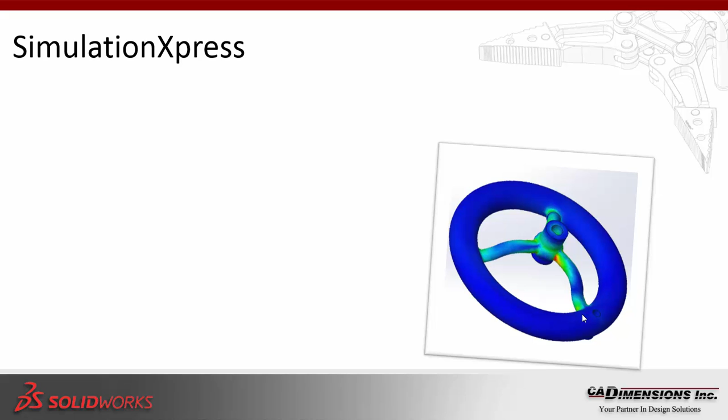Let's go ahead and start our presentation today with Simulation Express. Simulation Express is basically a first pass FEA, finite element analysis, software within SolidWorks itself. This is a structural analysis tool which will allow you to test and predict how a part will perform under a load. Once you've applied all the necessary conditions, it will show you the areas of high stress, and how the part is reacting and deforming due to the loads and how the part is being fixed.

This is very useful because it can essentially detect potential problems within your design. This is a type of tool you want to use in the early stages of your design cycle. So when you first start designing your 3D part, it's a good idea to run a Simulation Express as you make changes to, say, the thickness of the part, an extrusion, a revolve, or a radius. Run a quick Simulation Express to see how the stresses are being distributed, and make sure you're not creating any stress pockets within the part itself.

Another side note to keep in mind is that this tool is by no means meant to replace any type of simulation testing you may already be doing within your design cycle. Simulation testing, FEA analysis, is very important when it comes to designing parts. To address that, we have a full suite of simulation products within SolidWorks itself, which you would use in the later stages of your design cycle for virtual prototype testing.

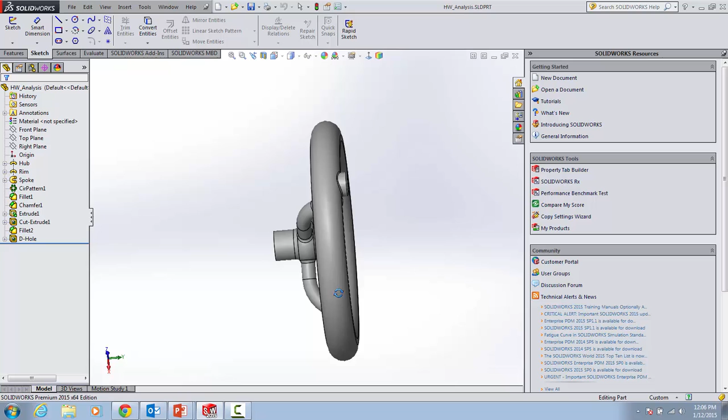A good way to predict dimensions such as the thickness of the part is to test it under extreme conditions. As the engineer, I know that eventually a part like this, once manufactured, may end up somewhere in a factory or manufacturing plant, which may have high temperatures and different humidity levels. This can cause the parts to rust, especially if you have a hand wheel that doesn't get turned for many months or years. In some cases, it may start rusting and get stuck.

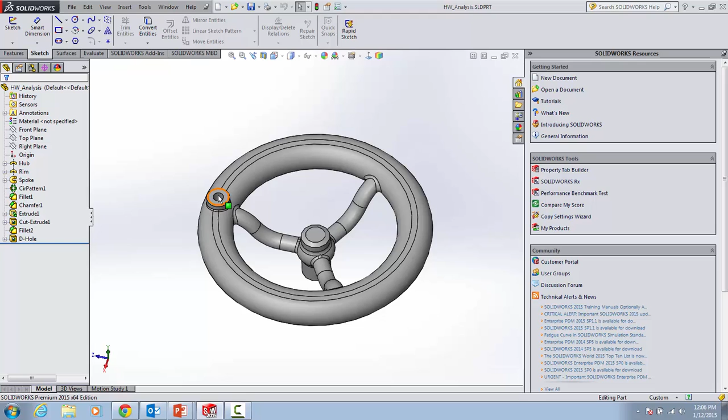When a hand wheel like this gets stuck, essentially what happens is you either crank it using your body weight, and if that doesn't work, you might start using tools to crank the hand wheel. In real life situations, one of two things can happen: the rust will break and you'll be able to start cranking the hand wheel again, or the hand wheel itself might break.

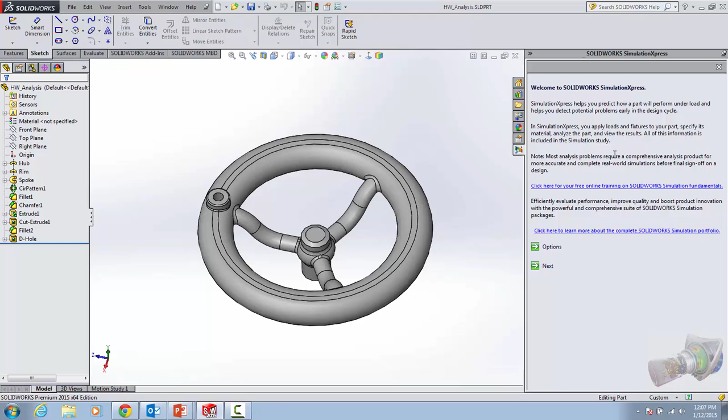As a designer, this is a big concern for me, and I want to test this part out as I'm designing it. To access SolidWorks SimulationXpress, just go into Tools, Express Products, Simulation Express, click on it, and this will bring up the welcome page for SolidWorks SimulationXpress. This page gives you some information, the same type of information I've given you before on what SolidWorks SimulationXpress was built to do.

Essentially, you would just hit next here, and this is where you start to set up your simulation analysis. Within this tool, there are 6 major steps to be able to run a full analysis.

The first step is to create your fixtures. This will imitate how the part is being held in real life.

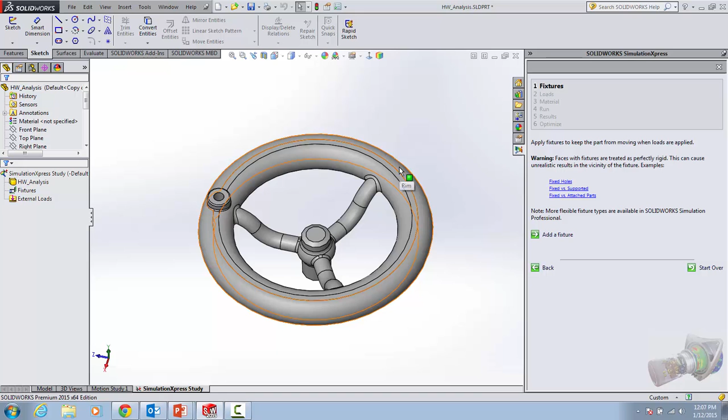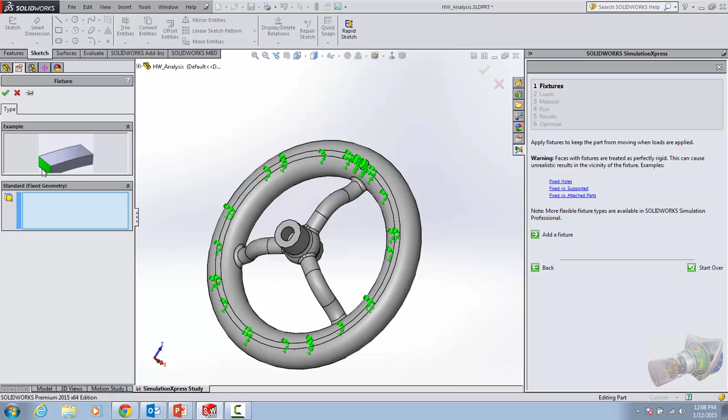Thinking back to our extreme case, this part will be stuck. So I'll add a fixture, and SolidWorks SimulationXpress gives me nice pictures to show how the part will be held based on the selected faces. If I select these 2 faces, this will simulate the part being held in place and not being able to move or rotate.

Once I've selected those 2 faces, I just hit the green check mark and I'm done. At this point, I can add more fixtures, or hit next to move on to my second step, which is applying the type of loads.

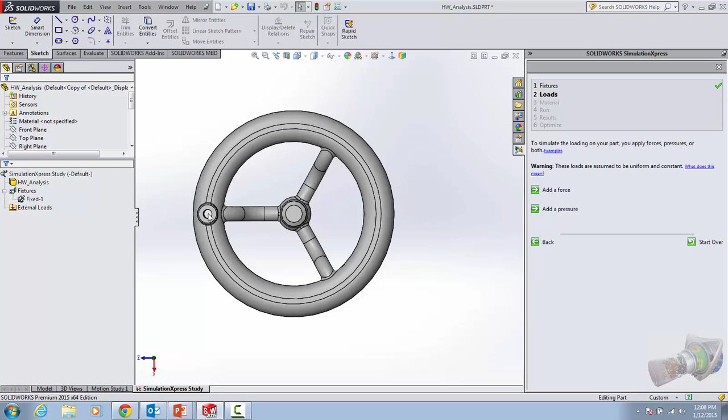Now for loads, you can add a force or a pressure. In this case, I'm going to apply a force which is in a crank motion, going in this direction or this direction. In real life, if I was going to crank this, I would probably pull down on this crank in the vertical direction, not try to crank it rotationally. It will be going straight down, so that's how I'm applying my force onto this hole, where a crank might sit.

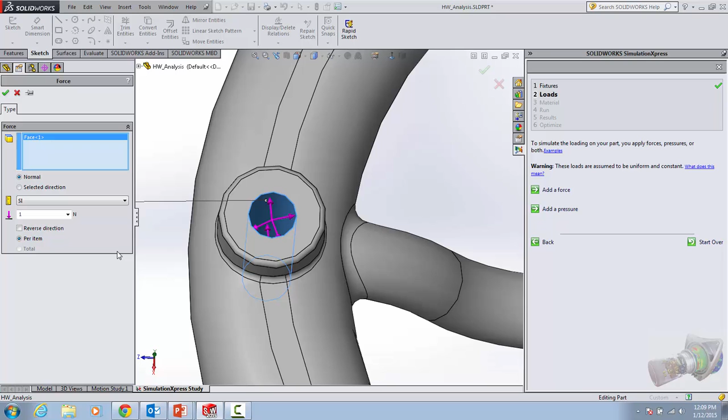So I'll say add a force. Now to create the force is exactly the same as the fixture - you select the face. However, when you select the face, the force will be applied directly onto that face. You then need a second step to direct that force in the correct direction.

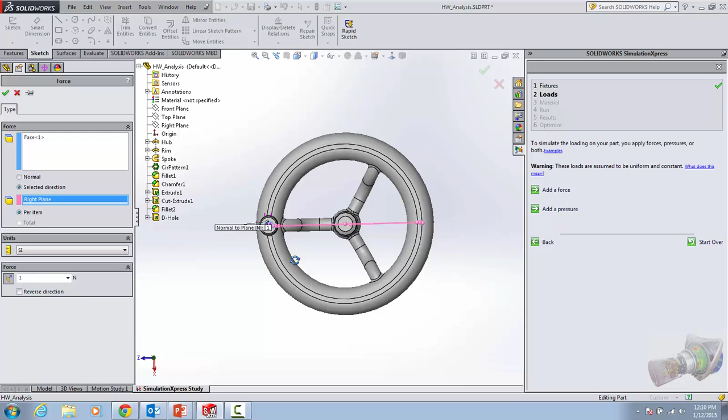So in this case, I'll say selected direction, and pick a plane which is normal to the direction I want. If I want the force to go down in this direction, I'll pick my right plane. You can see that's my right plane right there, and the force arrows have now changed to point normal to that right plane.

The force I'm going to use - think about a hand grip is about 150 newtons, so 2 hand grips is about 300. I'm going to multiply that by 10, so about 3,000 newtons applied onto this hand wheel. That's quite a bit, but this includes all my safety factors within the part itself. If it's built to last 1,000 newtons, I'm giving it 3 times the safety factor, so it can withstand up to 3,000 newtons without problems.

It's always a good idea to design better parts so they last longer, especially parts that come with warranties. So at this point, I can either add more forces or add a pressure, but I'm just going to hit next. Now the next step is to add a material.

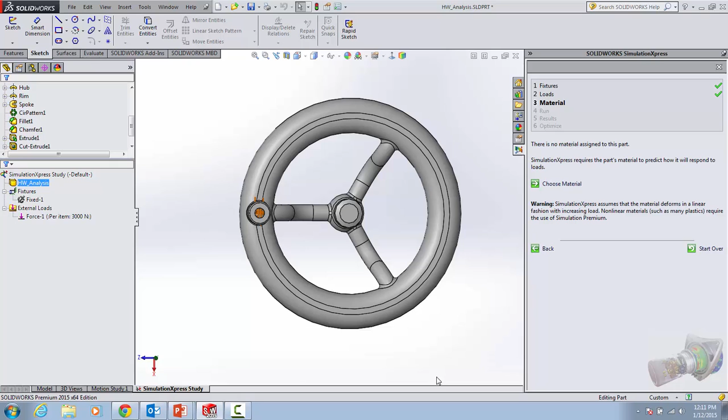It's important to add the material to your part, because that's where SolidWorks SimulationXpress extracts the strength information of your part. So if I say choose material, I'm going to choose a realistic material for these types of hand wheels, which is probably brass - copper alloy, brass.

I'll apply and close, and right away it extracts the Young modulus and the yield strength. This is essentially how the part will stretch and deform, and this drives the strength of the part itself, showing us some of the stress pockets or high stress areas based on this yield strength.

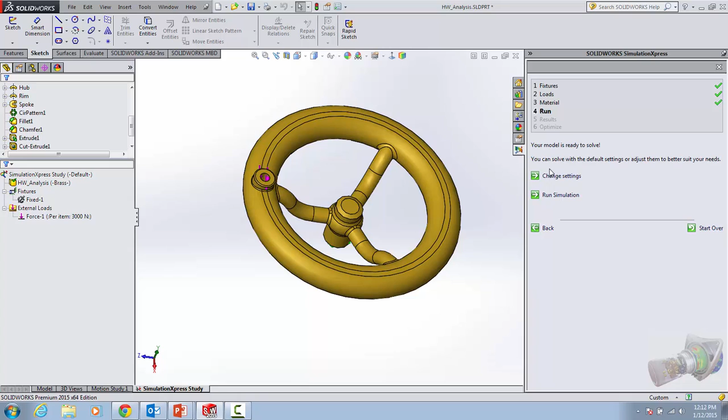Okay, so I hit next. That's all you essentially have to do to set up the simulation. Now you just hit run, allow the part to solve, and right away SolidWorks SimulationXpress gives you a quick animation on how the part will react to the forces you've applied.

Based on how this part is reacting, you can see it actually has that hand wheel motion, being cranked based on the force applied in that vertical direction. So to answer the question - does the part deform as you expect - I'll say yes, continue.

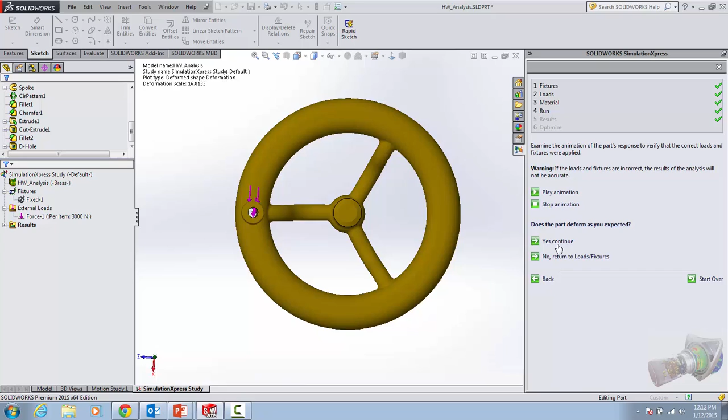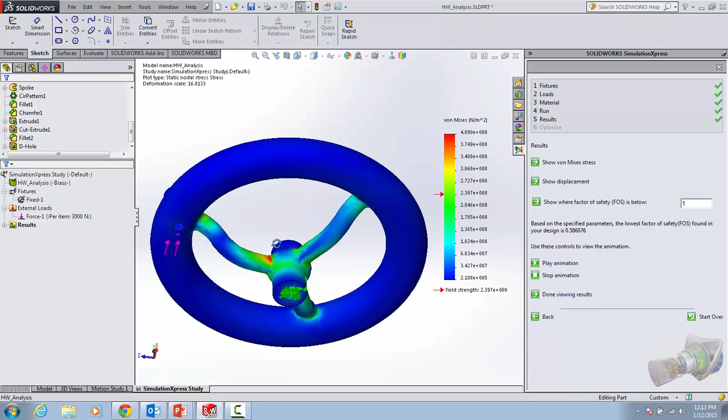The next step, step 5, is where I can view all the different results that SolidWorks SimulationXpress provides. The first result is the von Mises stress. Within the von Mises stress, I can see where my yield strength is placed and some areas which surpass that yield strength, in the red zone, the danger area. You can see that end of those spokes there - it's not very good, so this might not be a very good design.

So if I show my displacement instead, the highest displacement that occurs within this part is 1.19 millimeters, so it might not be that bad after all.

Based on my factor of safety, it is found to be 0.586, so it is half of the force that I applied, 3000, so it should be able to withstand up to 1500 without any problems.

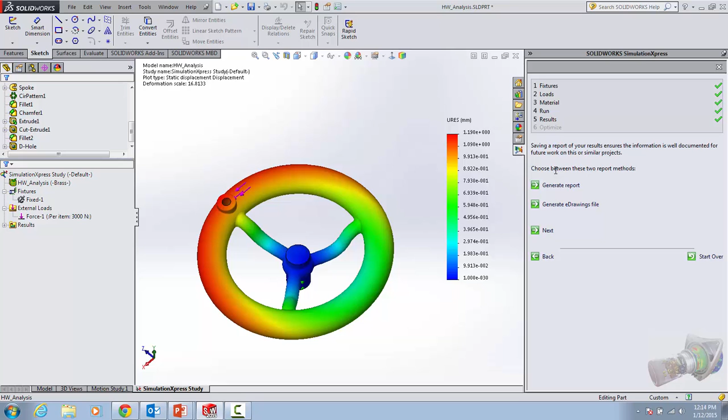Alright, so at this point you can say done viewing results, and the next step is you can actually produce a nice Word document or a report for you to print out and keep on your desk, or to file, or even to give to a prospect or your customer on some information that you got running this simulation. So in this case I can say generate report.

And I'm going to say in this conclusion that this part may fail due to very high loads above 1,500 newtons. Alright, and I'm going to say generate, and you can see as long as you have Microsoft Office 2007 and above, it will automatically tie into that software and generate this report for you.

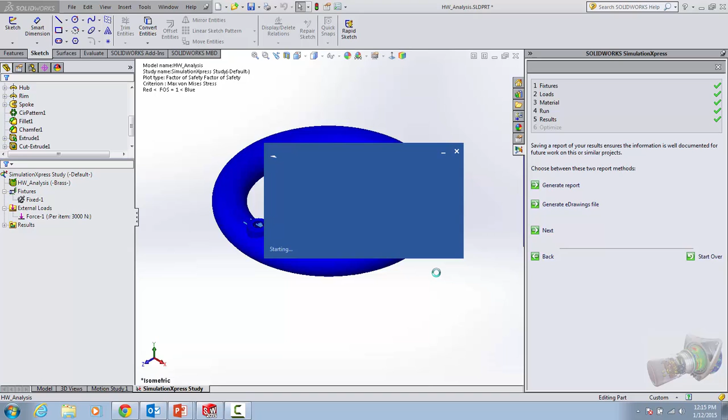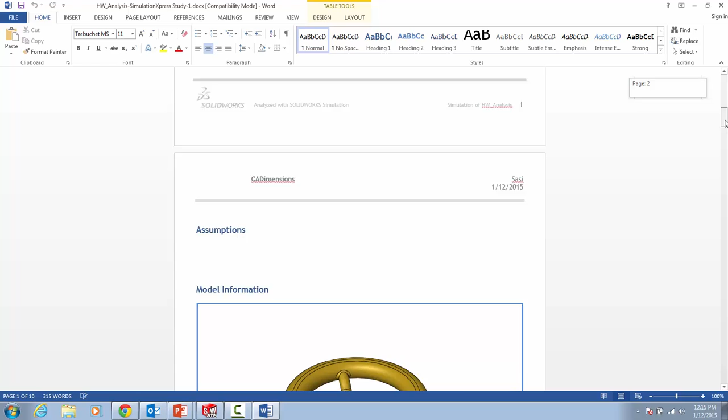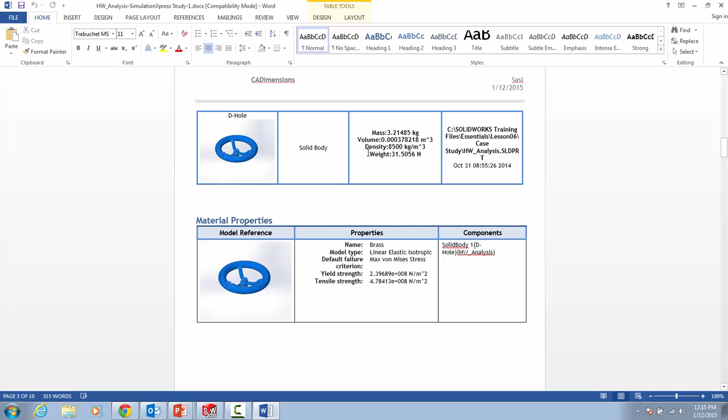Right away I get that report. You can see that this is a 10-page report, very good, quite a bit of information, and you can see that it has the part itself. It shows the type of properties the part is carrying, such as the mass, the volume, the density, the weight, based on the material that is being set, which is brass.

You can see how the part is being fixed here, how the load is being applied onto this part, the mesh information that went into creating this part, how the mesh actually looks, and last but not least the result, which is probably the most important part of this report, and your conclusion, which I essentially wrote in.

Okay, this document is fully editable. You can edit it, save it, print it out, and pretty much do whatever you want with it.

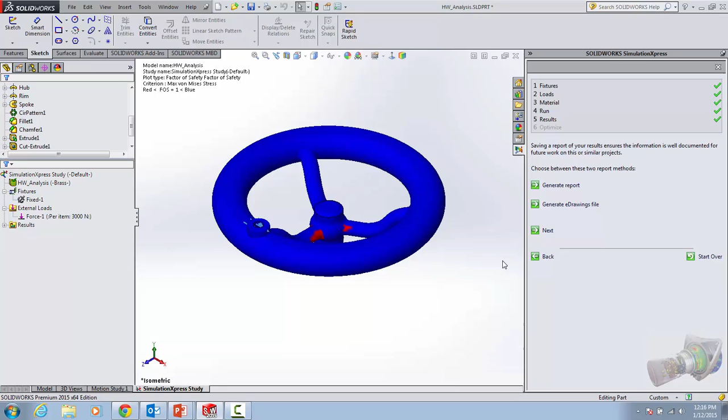Alright, so you can also generate eDrawing files. So what this does is it allows you to send all that results into your eDrawing, so you can send it off to someone and they can even view all those results within the 3D model itself with all the pictures and all the colors. Give them a good perspective rather than just looking at a report or a PDF document.

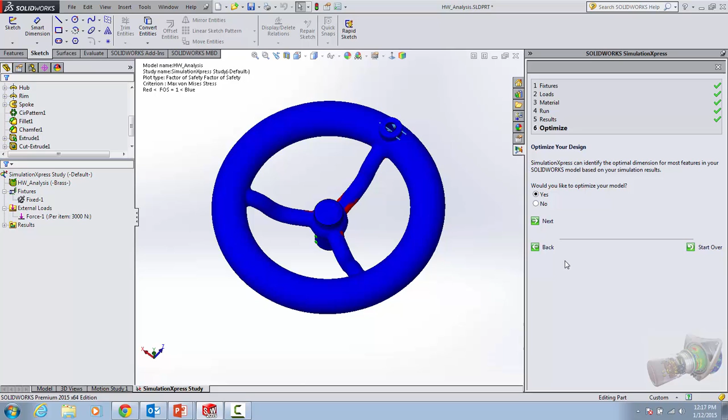So here I'm going to hit next. Now in this case, if you're not happy with your results, you can actually optimize your model. So let's take a look at optimizing this design here. So would you like to optimize your model? I'm going to say next.

And what would happen is that the part would bring up all the dimensions that went into building that part. And you can actually start picking dimensions to create parameters, and using that parameter you can build different ranges or different sets of dimensions and run an optimization study. So in this case, it showed me that the spoke itself might not be thick enough.

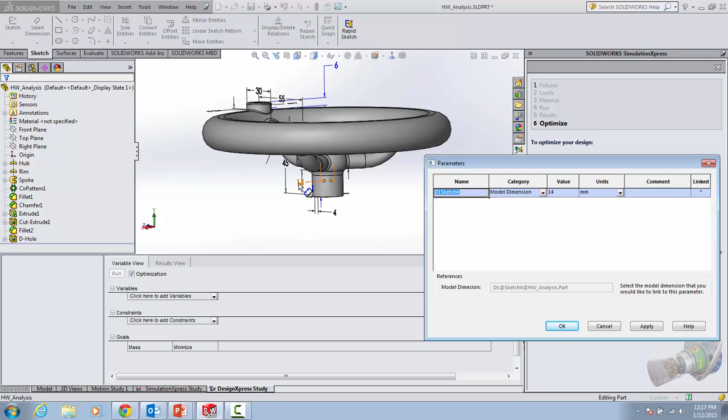So in this case, that spoke dimension here is actually 14. So I might want to bump that number up to perhaps 18 or 20 or 22. Now I'm not sure if 18 is going to be a good enough number, or perhaps 22 might be an overkill. It really depends on what I'm trying to do for this part.

So what I'll do is I'll pick that 14 as my parameter, and here I'm going to say okay to add that to my parameter list. And instead of using a range... well, I'm going to keep using a range, but I'm going to set this number between 18 to 22. So 18, 19, 20, 21, and 22. It will run 5 different instances.

Based on some constraint that I'm setting, it can optimize and actually tell me which would be the best dimension to set this up to. So here I can say maybe factor of safety is greater than 1, just so that I can hit that 3000 newtons mark, and my goal is to minimize my mass. So that's fine, I can set that, leave that as is. So as soon as you've set up your 3 conditions here, just hit run.

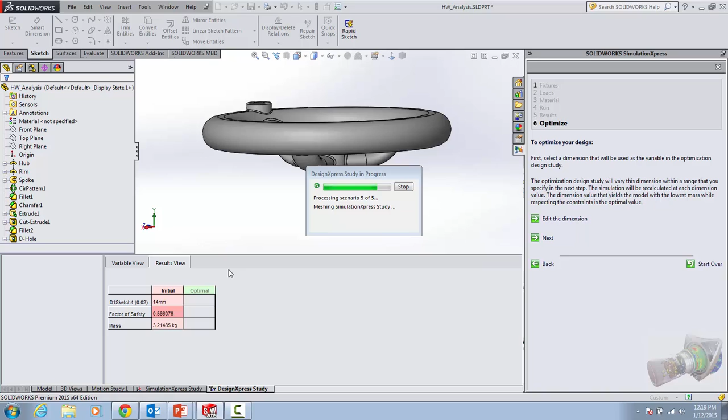Right away, the SimulationXpress will run 5 different instances, and it will give me that optimal number. Here it says optimal is 22 millimeters, so that's the maximum number, and only at 22 millimeters will I get a factor of safety above 1. The final mass would be 3.34 kilograms, which is something I could probably live with, not much difference from my original mass.

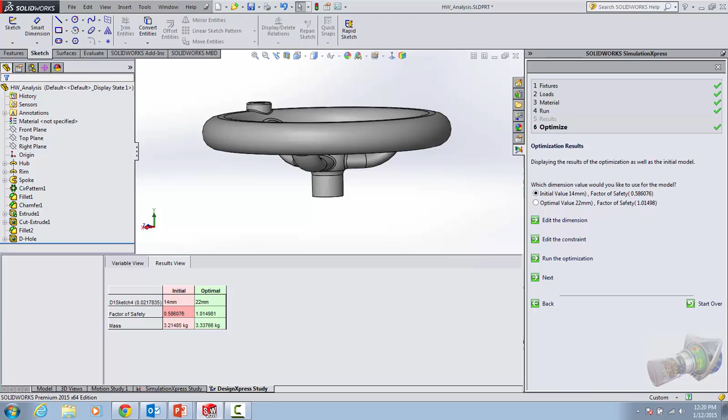Pretty nice, concise tool to use. Again, readily available, you can start using that as of today. Alright, so that's all I wanted to show for Simulation Express today.

Now let's head back into our PowerPoint. As I had mentioned before, this Simulation Express by no means should be used to replace a full-blown FEA analysis within your design cycle. So to run your virtual prototype testing, SolidWorks has a SolidWorks Simulation suite.

Next up, let's talk about FlowExpress. Now FlowExpress is a CFD package, a CFD version of Simulation Express. Many of you know SolidWorks has a full-blown CFD package called SolidWorks Flow Simulation, and this is essentially a first-pass version which allows you to calculate how fluid will flow through your part or assembly model, find any pressure areas within your enclosed parts, and show you how the fluid is flowing. So if there's any leakage in your model, or pockets where fluid is building up, it will show you based on the velocity field within FlowExpress itself.

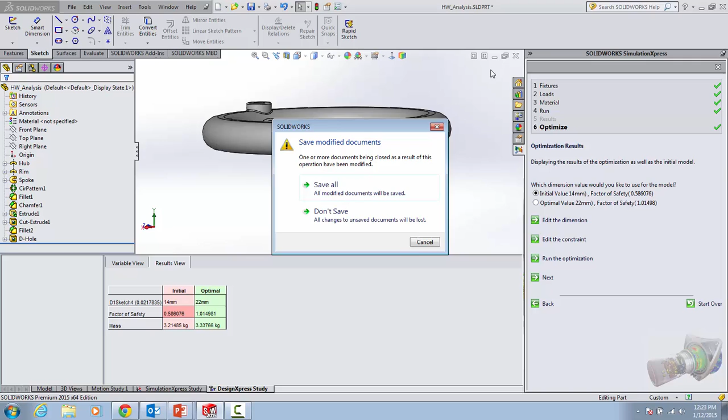Let's take a look at an example of this within SolidWorks. I'm going to close this out. What I have here is a globe valve which has fluid flowing through it and fluid flowing out of it. Now unlike SolidWorks SimulationXpress, which you could only run on SolidWorks parts, SolidWorks Flow Express you can run on both parts and assemblies.

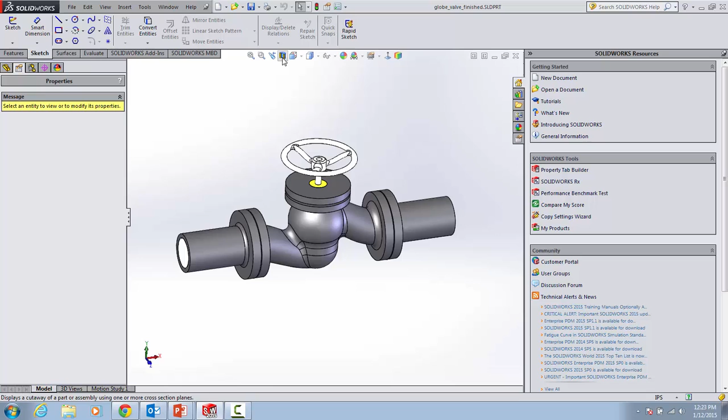Let's take a look at a section view of this valve, and you can see how the inside is built, essentially how the fluid will flow in here at the input, and then out the outlet right here, the inlet and the outlet right here. Now the most important step when creating a FlowExpress is that the part needs to be airtight. In this case, you can see I have two lids here which completely close up that inside volume.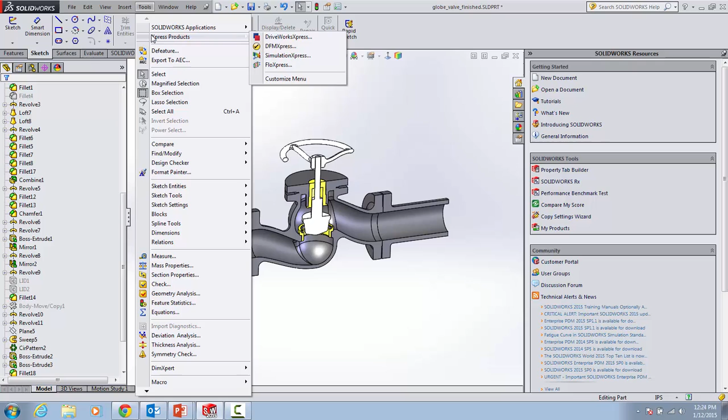Now if I were to simply suppress these parts and start to use my FloXpress tool, when I start the FloXpress it will say welcome to the SolidWorks FloXpress, very much like the SimulationXpress, and I hit next.

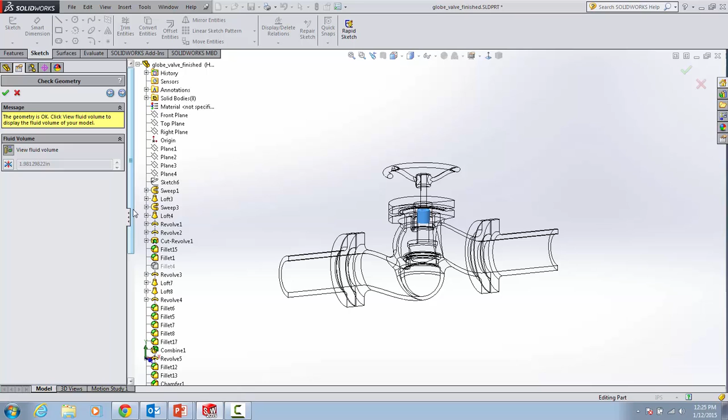If I say view fluid volume and hit OK, now that is not correct, because the fluid running through the system should be within the inlet and the outlet. So essentially now you have a model which has a leak in it, and this will not run correctly. So you have to fix that within your model itself.

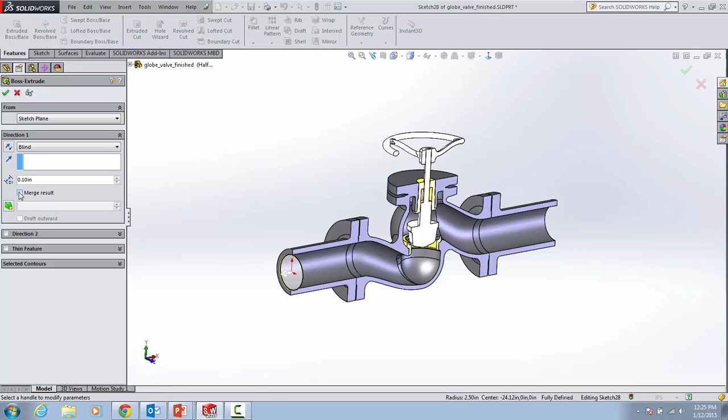One way you can do that is to simply come in here and create a lid by sketching on that face. So I can come in, use a sketch on that face, use convert entities, select that circle, say OK, features, extrude. Make sure you uncheck that merge result because it has to be its own body. The extrusion should be towards the inside of the model, so I'm going to change that direction, and say OK, and that is my lid that has been created for this part.

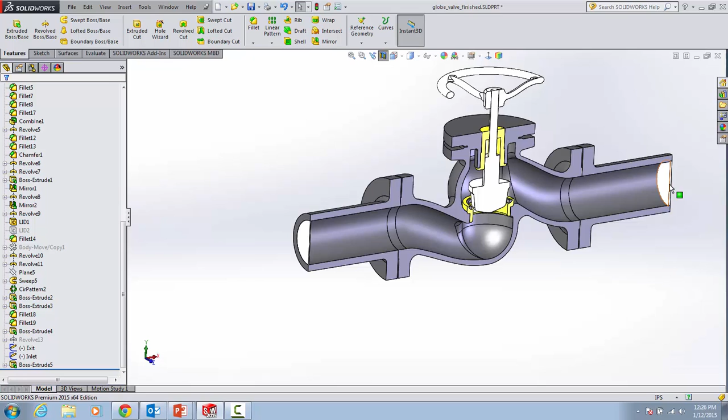Okay, so let me go ahead and unsuppress the second lid that I have here. I'll turn off this lid as well, just so I can keep the consistency of the thickness on both sides. Alright, so now I'm ready to run my FloXpress. You can see right here, if I say view fluid volume, that is the correct volume within my part itself.

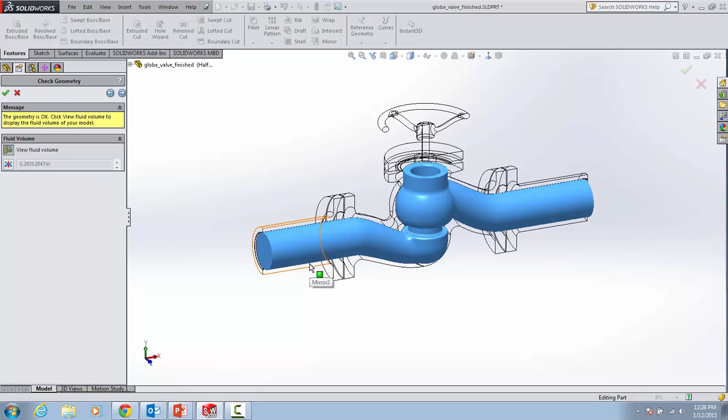Now this functionality alone is very useful when it comes to designing airtight products, or products and assemblies that have fluid or air running through them, because you can see how the distribution of that fluid or air within your part is. Now once I have verified that it's an airtight part without any leakages, I'm going to hit next.

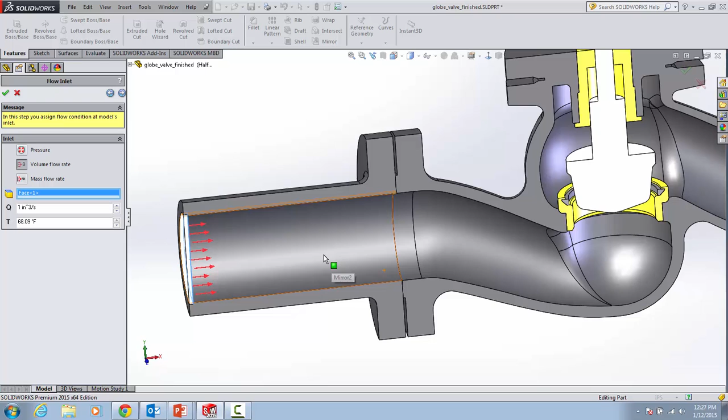You can pick to either have water or air running through your system. In this case I'm going to say water. Hit next. Now the first step is to apply the type of flow for your inlet. For my inlet, I can pick just a pressure, a volume flow rate, or mass flow rate. In this case, I'm going to say volume flow rate at 1 inch cubed per second, and the temperature I'm going to pick is about 68 Fahrenheit. I'm going to hit next.

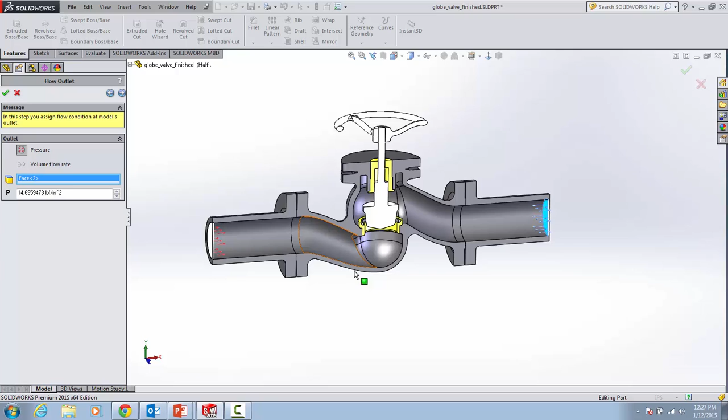Now for the outlet, it's simply going to be atmospheric pressure. So as the fluid comes and hits this outlet right here, it's basically flowing out into the air. I'm going to hit next. That's it. I solved the simulation.

And right away it will show me the water molecules or water particles within my system itself. Now to give you a better preview of how this fluid is going to be running through your system, you might want to pick the pipes and just hit play, and you can actually see that trajectory as it's flowing through your system.

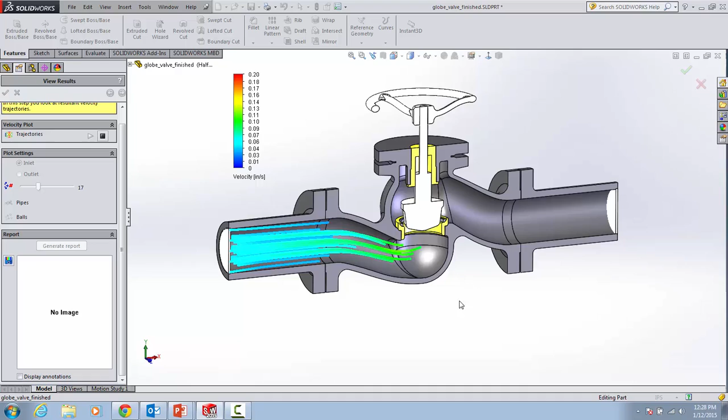Now what's nice about this is you can see how that fluid is kind of building up down here, so you might want to change the dimension of that curve down there, and you can also see how the velocity is at that valve opening, and also as it comes out the valve, is it picking up velocity or is it losing velocity as it's coming out. These are the type of information you can get from your FloXpress.

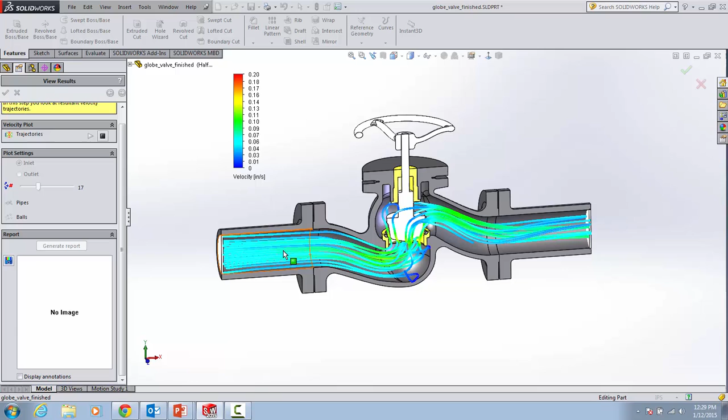So in this case, we have a pretty successful part where the fluid is running through the system without any problems. Now again, just like Simulation Express, you'll be able to generate a report for FloXpress. Just hit generate report, and you can see that I have a Word document which gives me all the information with the inlet, the environment, pressure at the outlet, and the velocity running through my system, or what the velocity is at.

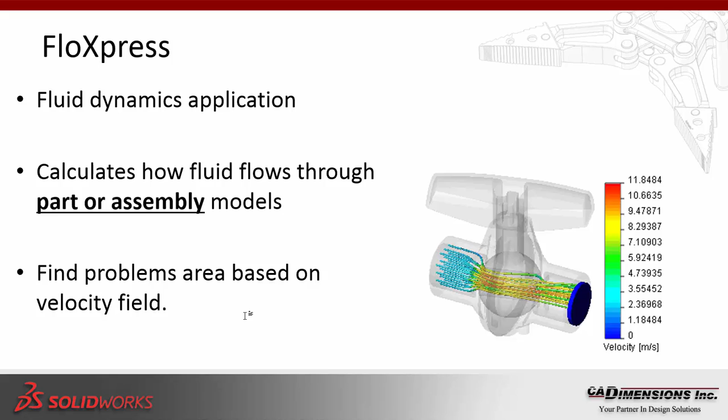Alright, so that wraps up SolidWorks FloXpress. Now just like SolidWorks Simulation, FloXpress is by no means a tool to replace any kind of computational fluid dynamics analysis that you may or may not be running in your current facility. So if you do need to run any type of fluid flow analysis, SolidWorks Flow Simulation can address those types of analysis. You can see here that we have an array of analysis types within our SolidWorks Flow Simulation.

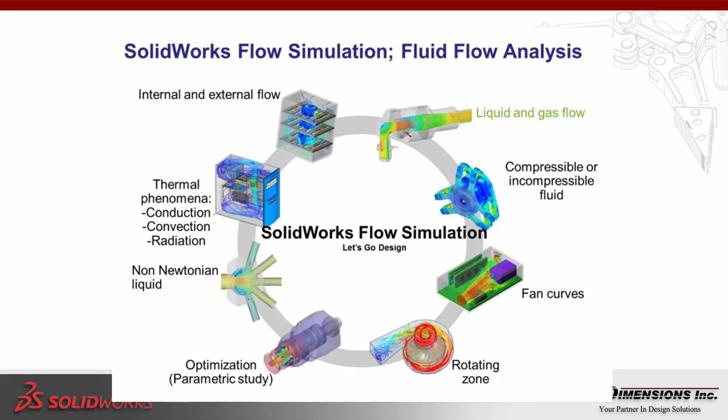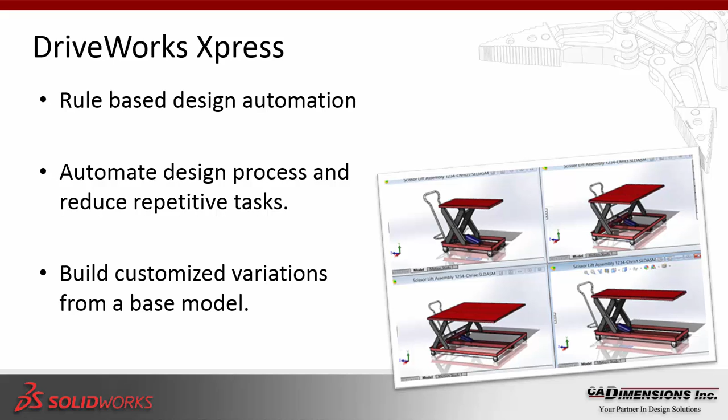So I'm going to start this portion of the presentation by opening up an existing assembly that already has DriveWorks set up in it. The reason I'm doing this is because I want to show you the amount of capability and depth of capabilities that's already available within DriveWorks Xpress, and this is pretty remarkable considering that this add-in is already available within your version of SolidWorks right now, and it's completely free. You don't have to pay anything extra to get access to this.

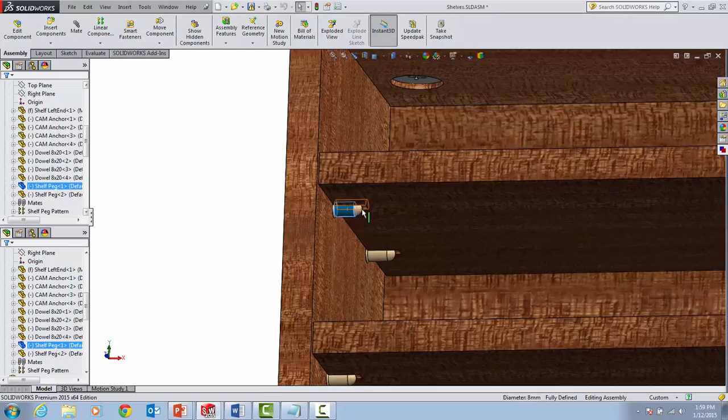So what I have here is a shelving unit which has every bit of part included in it, and it basically includes all the cam locks, all the pegs that hold up these shelves, all the cutouts for the pegs. It even includes all the screws in the back to hold the backboard, and all the material have also been set in this assembly.

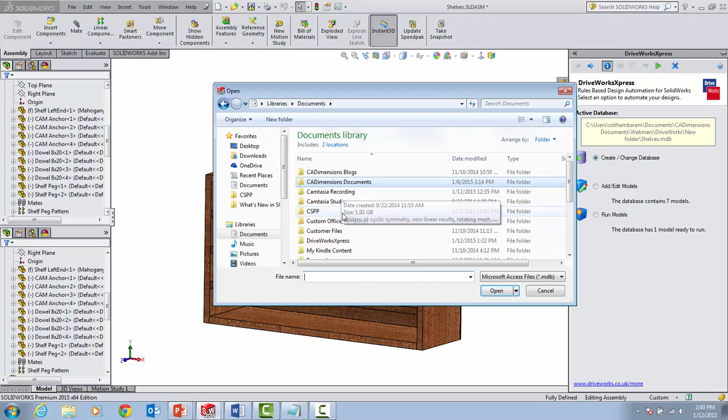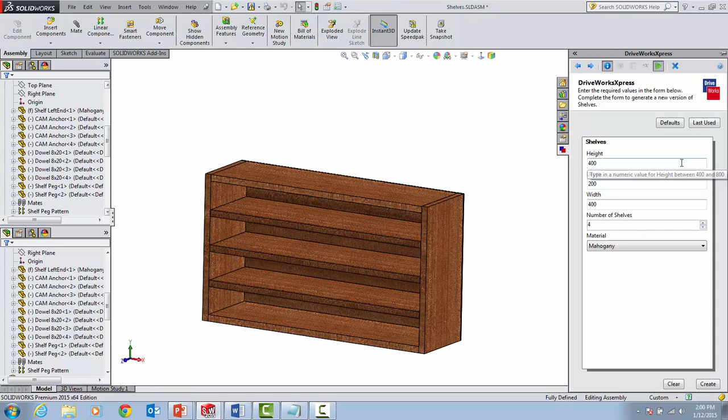Now when we invoke DriveWorks Xpress, the first thing is to make sure that you're in the right database. So I'm going to create or actually set a new database, which is this .mdb file, and this .mdb file gets created when you start up a new DriveWorks project. So this is a completed project again, and you can see from my menu here, I can pick and choose some different combination of this assembly to create a completely new assembly.

So let's go ahead and play with some of these numbers. I'm going to say the height of this is 600 millimeters. I'm going to keep the depth the same. I'm going to keep the width the same. I'm going to add number of shelves, I'm going to say 5. And I'm going to change the material to pine. And watch what happens when I say create.

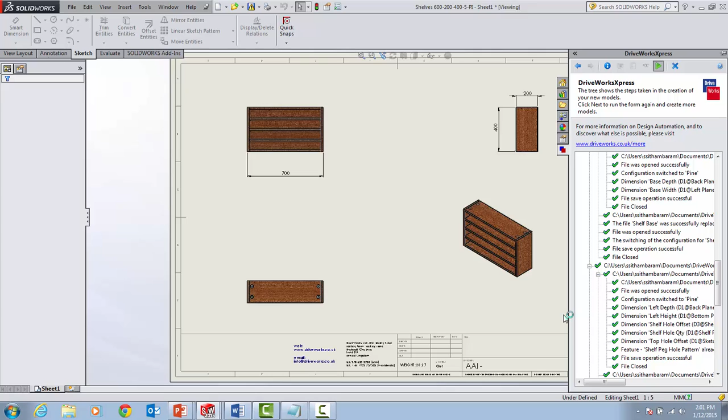You can see all the parts that go into building this shelving assembly is being recreated in the background, all automated. And even all the drawings that are associated with the assembly also get created for you automatically. So you see here, you can actually see all the process that it went through to build this new assembly, and voila, a whole new assembly with the 600 millimeter height and 5 shelves as I picked in my menu.

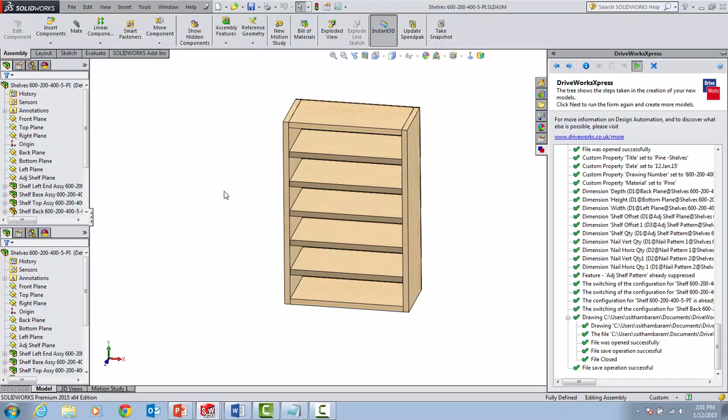Also a new material. Now if we take a look at the folder that we created, you can see here all the new files were created for me, and even more so, you can see that I even have a drawing that has been updated automatically for me.

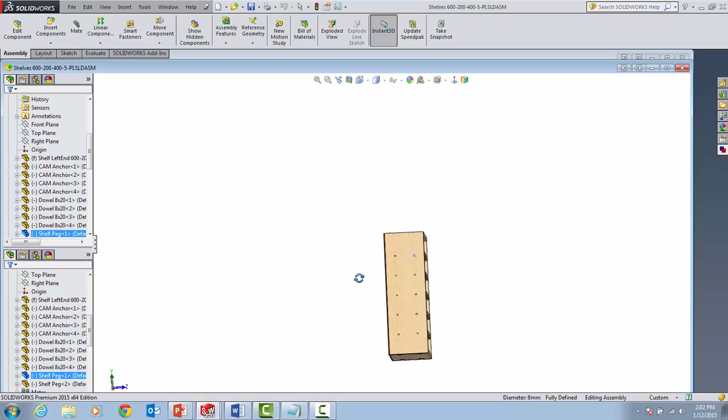Now keep in mind there was other equipment included in your assembly, such as the cam lock and the peg. They all updated to its correct new location, all done according to how you set up and created this assembly. As long as you've put all the right information in, you'd be able to create multiple assemblies such as this. So let's go in the background and see how we can create something like a shelf.

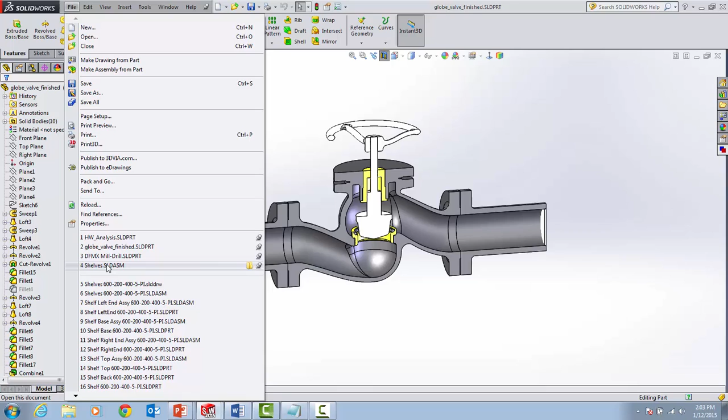So I'm going to open up a model that I have here. This is a simplified model. I took all the cam locks and the pegs away.

What I'm going to try here is set up a new DriveWorks database project which only drives the height of my shelving unit. Basically it gives me 3 options: if you want a 4-unit shelf, a 6-unit shelf, or an 8-unit shelf. So depending on what I pick, the new assembly should automatically create it.

So let's start by creating a new database. I'm going to say create database, okay, and I'm going to say this is for our demo. I'm going to say open, and add a model, and use current open model.

When you select this assembly or any assembly, the first thing you need to do is capture assembly structure. As soon as you say capture assembly structure, everything that goes into that assembly, all the parts, are listed in this menu here.

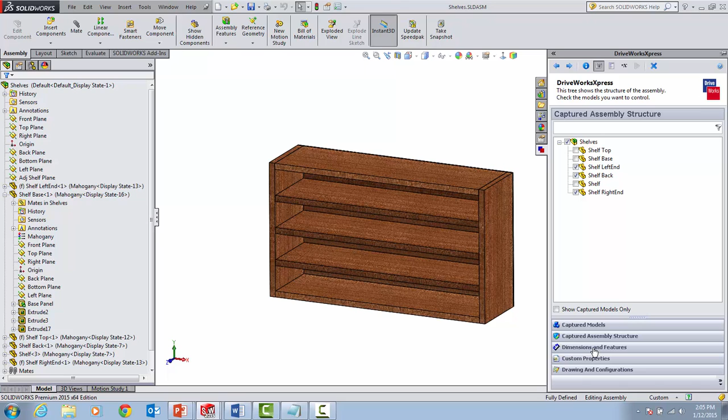So I'm going to double click the part itself, and I'm going to pin this in just so that it stays there. And if I pick on dimensions and features, if I pick that dimension, I can say left height and add that in.

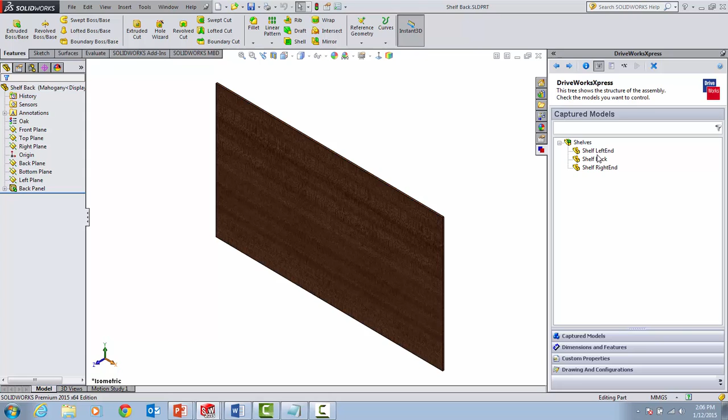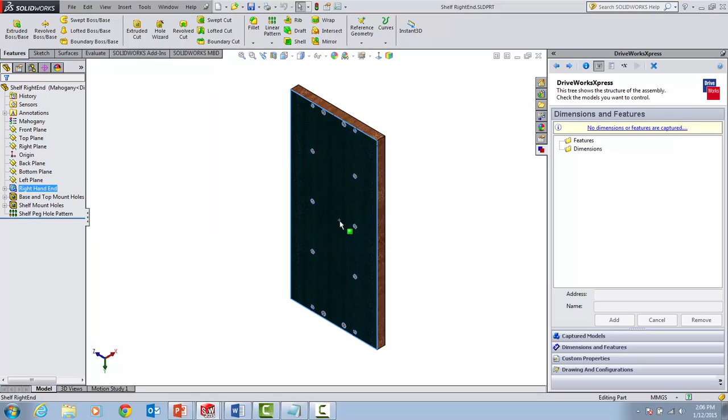Shelf back, back height, and add that in. Hit capture model, and then the right side, double click that, and right height, and add that in.

Now that I've added those three dimensions to drive my height, one more thing that will be affected when the height changes is the number of shelves, because that's basically driving the type of form I'm going to create. So it will be a good idea to create a driving dimension for the number of shelves that is going to be created.

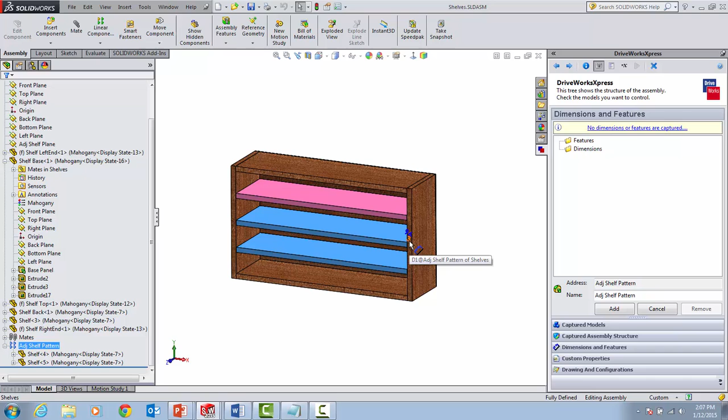Now the number of shelves being created in this assembly is driven by a shelf pattern here. So I'm just going to click on that, and you can see the number of shelf is brought up right here. So I'm going to click on that, so that shows up as a dimension, and I'm going to say number of shelves and add that in.

Okay, so all this is set. I'm going to say next. Now what is going to be driving the change of this assembly?

So this is going to be number of shelves, and I'm going to have this as a drop down menu, with 4, 6, and 8 as three different types of shelving unit that I can have: a 4 unit, 6 unit, and 8 unit.

And I will say next here, and in this page is where you set up the conditions to change the form that you've just created. So in this case, I'm going to say create a rule. You can see I have 8 rules here, 4 missing file names and 4 for dimensions. So let's pick both these.

And say next. Now for the file name, what they're basically looking for is when I create a new assembly, what is driving that new name. As you saw in the earlier example, when I created the 5 unit, it created an assembly with a .5 at the end, because that is the number of shelves. So I'm going to use the same technique here.

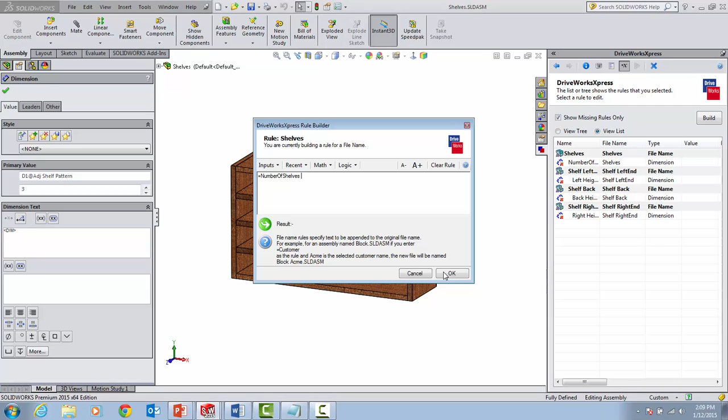I'm going to say build, and I'll input the number of shelves. You can see it gives you some information here. File name rule specifies the text to be appended to the original file name, so when I create another assembly, it's going to say shelf 6.asm, SLD ASM. Okay, so all that rule has been satisfied.

Now I have a number of shelves here, driven from that pattern. Keep in mind, 3 pattern builds 4 shelves. So what does this mean? When I say 4 shelves, the pattern value is 3. When I build 6 shelves, it's 5. When I build 8 shelves, the pattern is 7, because there are 7 actual shelves on the inside.

So this means when I say number of shelves, it actually equals the number of shelves I input minus 1. That gives me this number. So if I say 4 minus 1, that's 3 - that's the base unit I'm starting with.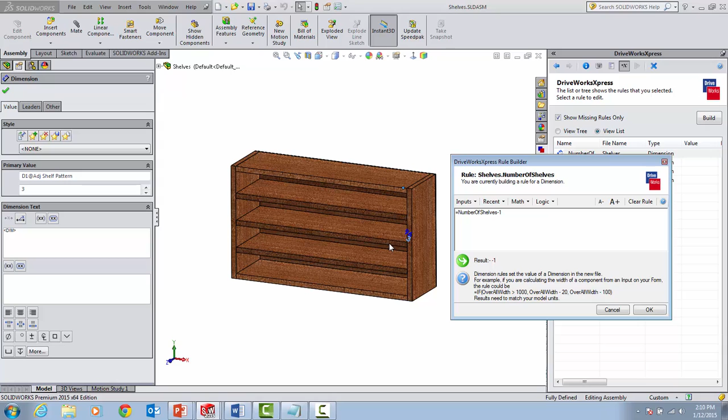I'll say okay here, and then I have this value which is currently set to 400 millimeters. It needs to change according to the distance of these shelves - 4 unit, 6 unit, 8 unit. So I've built a small equation to help with that, which you can see right here.

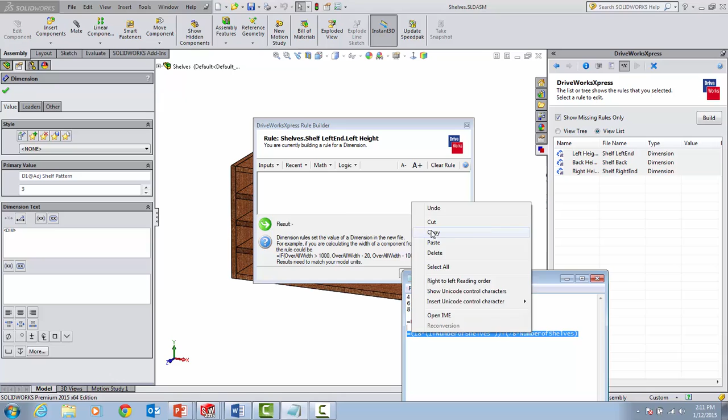What this essentially does is use 18 as the height of each shelf, and 78 as the distance between shelves, and that creates the new height for me when I change the number of shelves. I'll say okay here, so now all my rules have been satisfied.

So essentially that's it - I should be able to drive this assembly and create a new assembly with that new form I've created. Let's go ahead and say run.

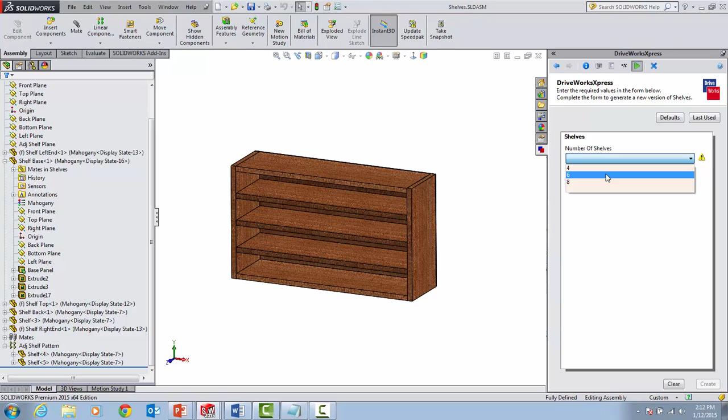Let's specify the number of shelves here that I need. Let's say I'm going to create a 6 unit shelf, and I'll say create. And there we go - it's a 6 unit shelf.

Now let's make one more. Let's create an 8 unit shelf, and I say create. And it creates the 8 unit shelf for me. Very easy to do.

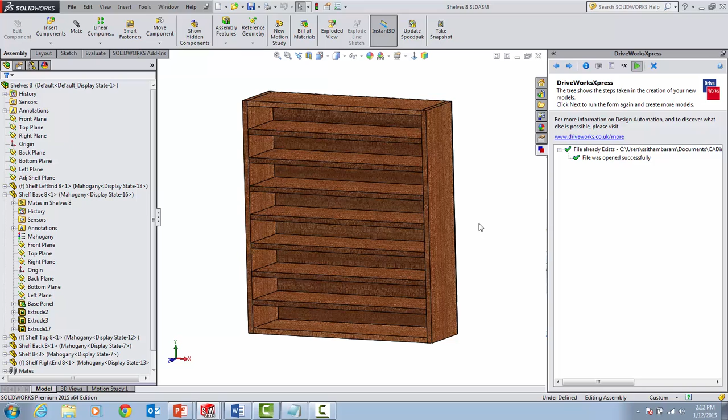Alright, so that concludes the DriveWorks portion of this presentation. Again, there's quite a bit that can be done in DriveWorks. Everything you saw today can already be done in DriveWorksXpress, which is fully available to everyone using SolidWorks right now.

Now, if you would like to have more control over the type of automation you're doing, where you can even include a sales quote, a BOM, then you can step into DriveWorks Solo. And if you want to try to integrate your PDM systems or your ERP systems, you can then upgrade to DriveWorks Pro.

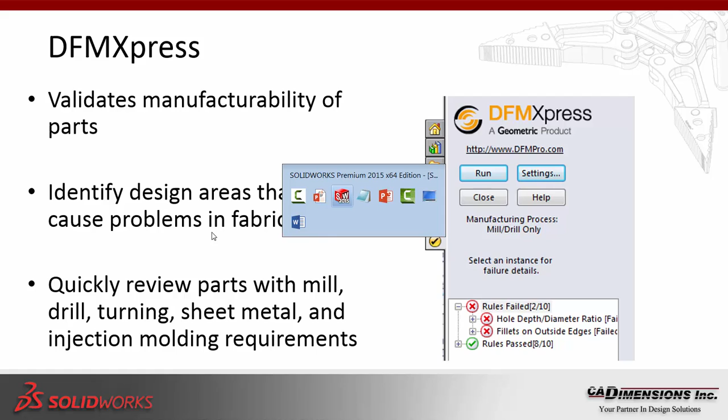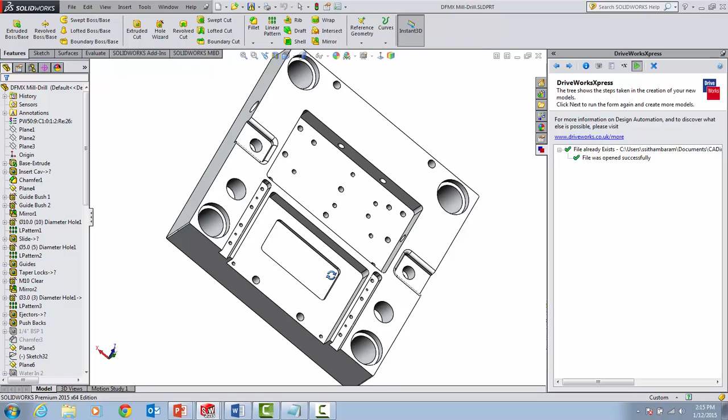Let's go ahead and take a look at an example of doing this within SolidWorks itself. I'm going to open up a part here. So here I have a part - it's probably from a plastic mold part. However, you can see there are a lot of holes and cutouts within this part, and I want to ensure...

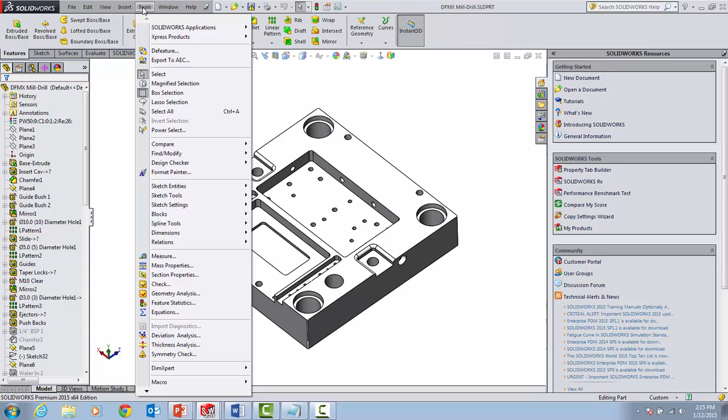...that this part will be able to manufacture well without any fabrication problems. So if I go into Tools, Xpress Products, and select DFMXpress - as soon as you open the DFMXpress tool, the first thing you want to select is your settings, because this is where you set if the manufacturing process is milling or drilling, turning, sheet metal, or injection molded. Clearly this part is just a mill and drill part.

Now DFMXpress tests your part based on a set of parameters that has to come from your engineer or designer - basically the requirements you set for your parts. Some of this information can come from your machining handbook or even your machine manual. So in this case, some parameters I can set here are: hole depth to diameter ratio, minimum percent of hole area inside part, mill tool depth to diameter ratio, minimum linear tolerance zone, and minimum angular tolerance zone.

You can also edit the standard hole sizes to set up some custom hole sizes that you may have in your facility. So I'm going to leave this at the default values and hit run.

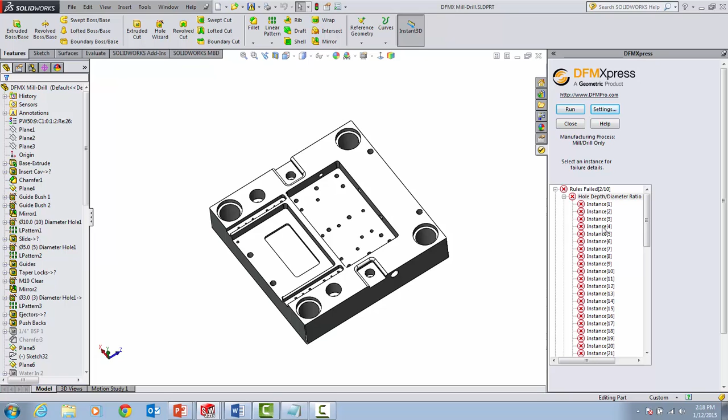However, I did have 2 failures here. The first failure is the hole depth/diameter ratio failure, based off the requirement that I had set earlier. If I drop this down, you can see that I have 51 instances of this failing, so there's perhaps 51 holes where this is failing.

If I pick on that first instance, it actually shows me where it fails. If I pick the second instance, it shows me where that hole is. This is a very helpful tool because not only does it highlight the hole within the part, it also highlights the feature in your feature manager.

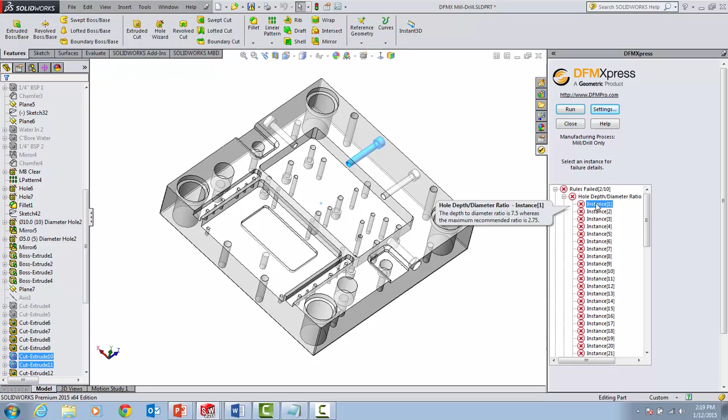Going back to instance 1, you can see that maybe I made a mistake in the settings. So I'm going to go back into the settings and bump this number up to 9 instead, and rerun this analysis.

Having bumped that number up to 9, you can see that I've passed 9 rules and I only have 1 failure at this point. When I hover over that failure, it says fillet on outside edges, and the explanation says that outside corners, chamfers are preferable over radii; an outside radius requires a form-relieved cutter and a precise setup, both of which are expensive.

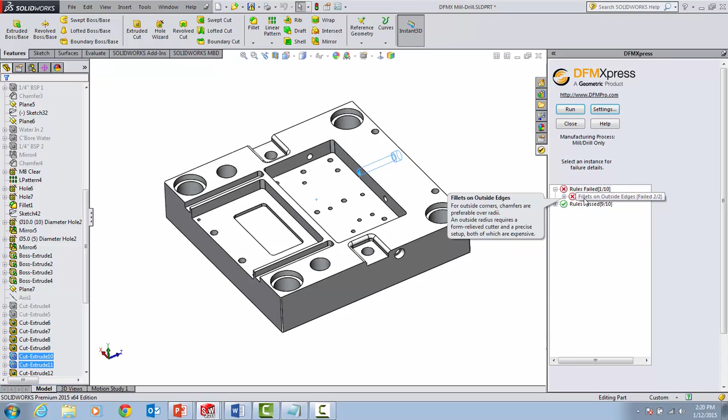If this is something that you have to have in your part, you can just disregard that and continue on with your manufacturing or part design. However, if this is something you want to avoid for expensive parts, you could fix that before moving forward. In this case, I can just pick on that instance right there.

It shows me where that outside fillet is located, and it highlights the feature right there for me, so I can right click that feature and say suppress. It takes it right away, and you can see that instance 2 is actually gone now, because that was the mirror of that fillet on the other side.

Now sure enough, if I run this again, you could probably already guess that I would get a 10 out of 10 passing rule.

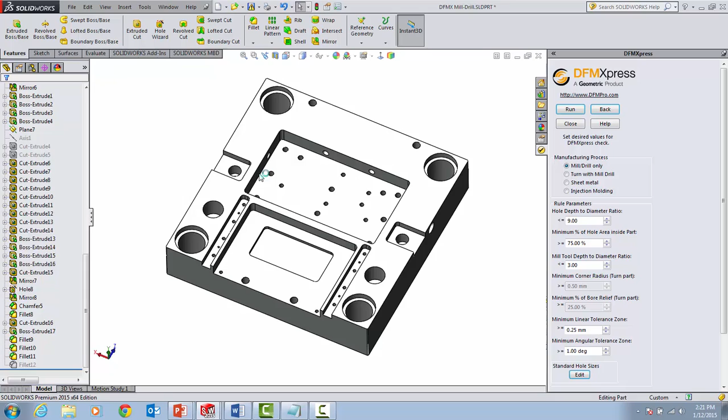So the DFMXpress doesn't stop there. There are many other manufacturing processes that you can play with. For instance, you can also take a look at a sheet metal part. When we have a sheet metal part, I can set sheet metal, and you have some different types of configurations or parameters here that you can set up. Again, I'm just going to leave this at default and say run.

You can see that I've had one failure, and the failure is that the bend radius may not be enough in this case. So here's when you can go back into that sheet metal tab on the top and change some of your bend radiuses.